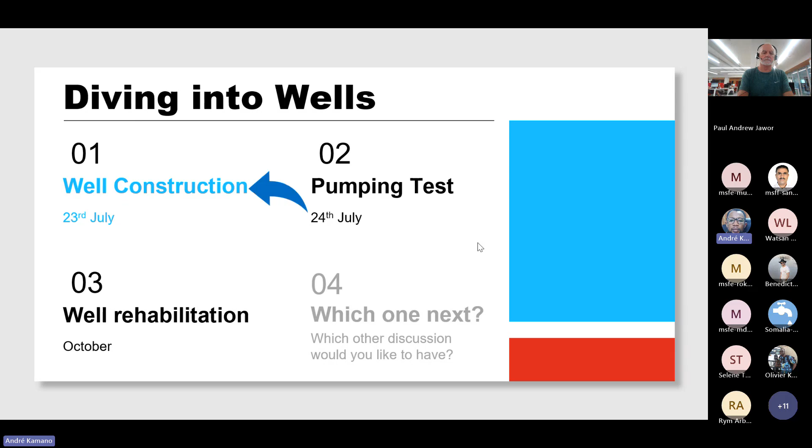So this first session on basics of well construction, we'll have as content: first, we'll be seeing the planning. In the planning phase, we will talk about why and when to drill a borehole. Secondly, we will be talking about well components, where we talk about the geophysics, the designing of the borehole, the supervision, and the flushing. At the third moment, we will be talking about the common mistakes that occur when we are doing the borehole in the field.

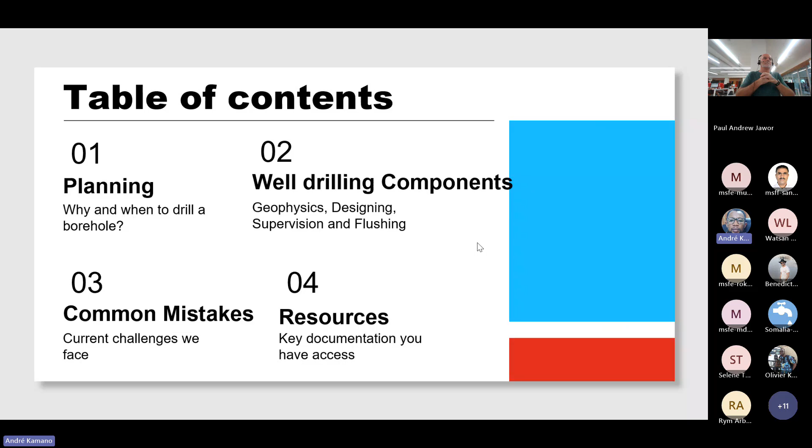So quickly, we will be having some key learnings that we hope everyone will understand and take away after this session. First of all, we'll be talking about some considerations. Main considerations are what we need to ensure before engaging in drilling a borehole. Secondly, we'll be talking about the components to understand all the steps that we'll be going through to realize or build our borehole. And at the end, we'll be talking about the monitoring session, how to supervise, and what data to collect.

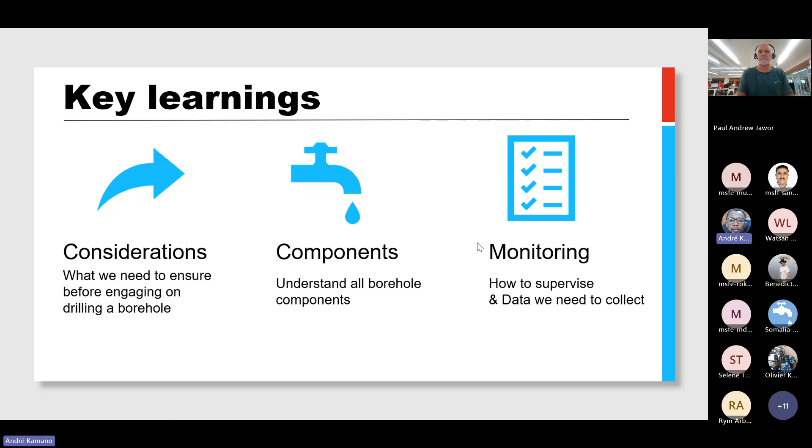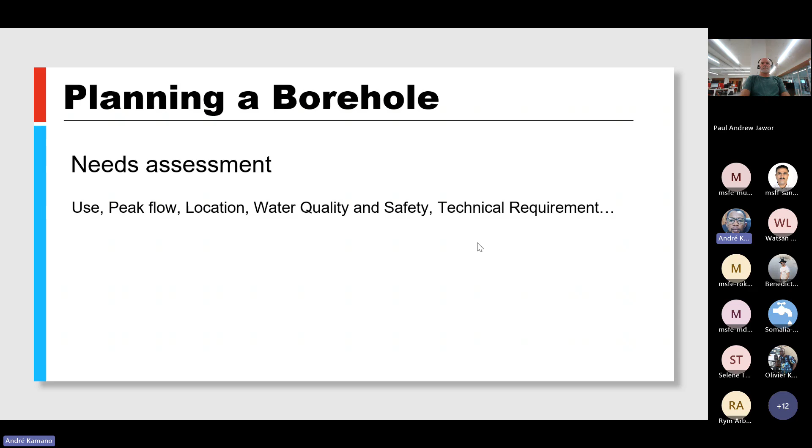We then start with the planning. When planning a borehole, compulsively we need to have the need assessment, which goes with talking about the use we will be having for our borehole. We will be having some idea of the peak flow - when is the need for the water that we are willing to produce. Then at the third point, we have to extend our thoughts on the location - where are we going to locate it. From that, we will talk about the water quality and the safety of this water - where is actually the safe point to have it. And later on, we will talk about the technical requirements. So these are the basic thoughts that normally we need to have when planning to have a borehole.

Upon those points, we may straightly look at the legal and community engagement considerations, which mainly are based on beneficiaries, but also authorities. Talking about beneficiaries means we need to consider the participation of community, which is very essential in terms of managing the system that we intend to build, but also to see how the authorities can manage it. On the other hand, we look at the question: if the authorities are not able to manage it after we have built it, what will be the outcome, or maybe the alternative of handing it to the community so the system can be more sustainable. So these are the first considerations that we may compulsively need to look at when trying to plan a borehole.

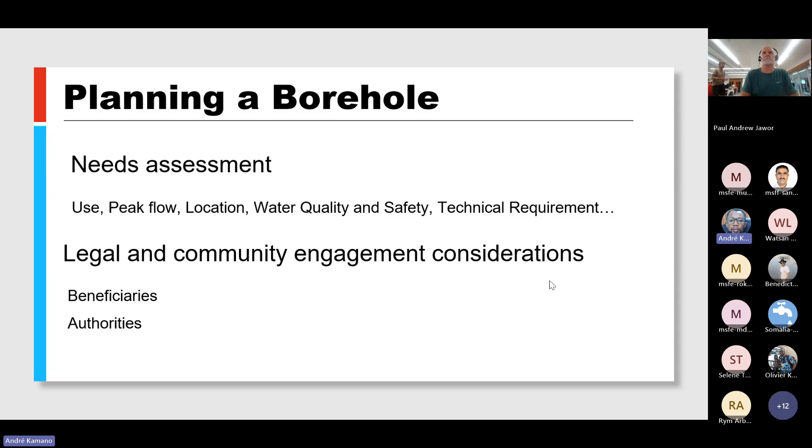After this, we now switch straight to the point, which will help us clarify more ideas about what we are planning to do. We then talk about the type of borehole you may need, since we have already gathered the information. We will decide whether we are going to have a borehole, but which type. So we jump directly to the different types of wells and boreholes that we may know.

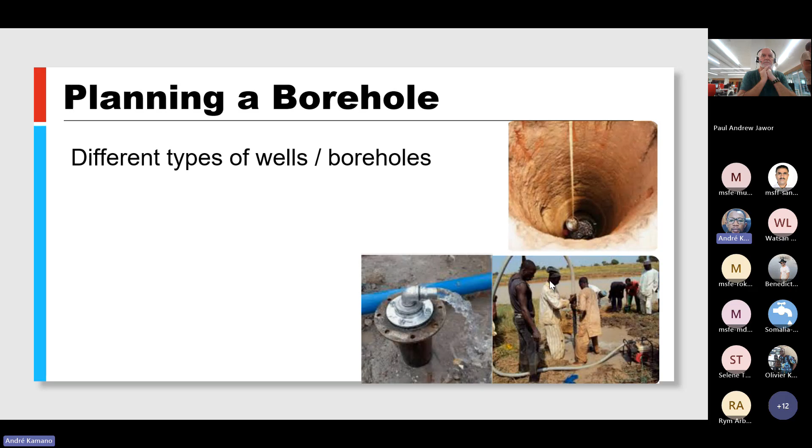For this webinar, we have chosen two criteria to talk about. The first criteria is the depth and the type of aquifer.

So we have chosen the shallow open well and boreholes, which you can see in the picture on the top right corner. Talking about shallow boreholes, we name them as boreholes that go up to 40 or 50 meters deep, not more than that. Mostly they are tapped in unconfined aquifer, and we realize they are most vulnerable to pollution because of the depth.

The second type in the first criteria is the deep borehole, which goes beyond 50 meters, up to 300 meters or sometimes above. These boreholes go into the aquifer, and they are more reliable, sometimes described as having a better quality of water.

The second criteria we have chosen for our webinar is based on construction methods. For that, we talk about hand-dug wells, drilled boreholes, jetted boreholes, and driven boreholes. Hand-dug wells are mostly manually excavated, and sometimes lined with concrete or bricks.

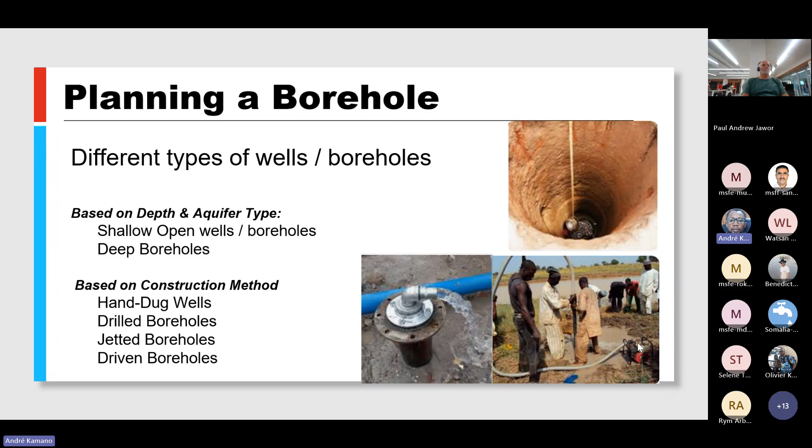Now we have decided we need to build our borehole, and we know what type of borehole we would like. Directly, the question will be, where are we going to drill it? We conduct some research that we call the geophysical survey.

The geophysical survey will help us choose or select the site where we are going to have our borehole or well. The geophysical survey is done in two phases.

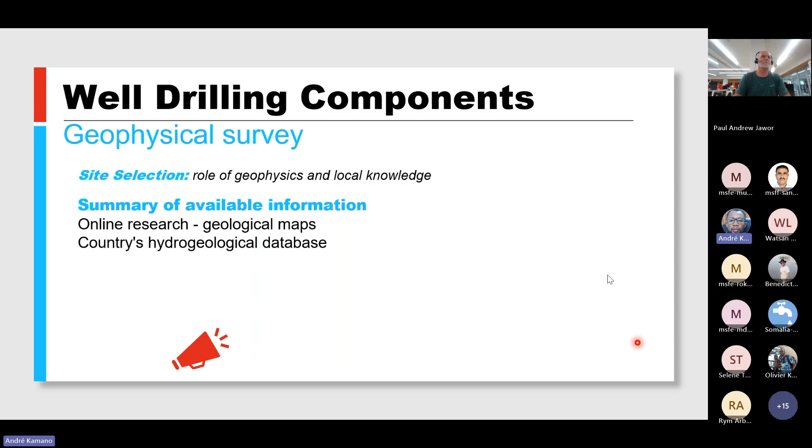The first phase is the summary of available information done online, which we can gather by consulting the geological map and also the country's hydrogeological database. After we have consulted all this information, it enables us to choose the probable sites we may select. There can be 2 or 3 of them, the probable sites we may select for our borehole.

The second phase is conducted on the ground, in the field. In the field, we carry out the exploratory phase, which consists of identifying the site with the best aquifer potential among those selected in phase 1.

This usually involves exploration using some methods. The methods commonly used are gravimetric, electrical, and can also be electromagnetic and seismic. After choosing, this helps us identify the best sites among those identified previously.

You have to notice that the geophysics is normally done by an accredited hydrogeologist, so that we can have the best result or analysis. This second phase of the geophysical survey is closed by writing a report, which gives us all the details and information we may need to develop our borehole.

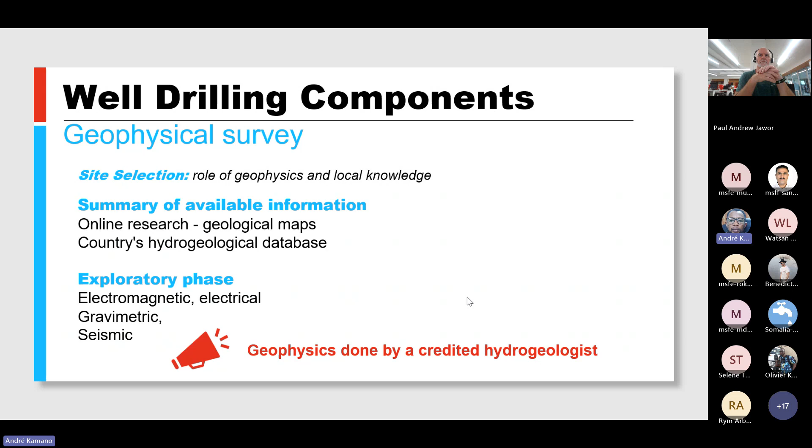Following that, we now start the designing, the technical phase of doing our borehole. We jump into the designing of the borehole. Talking about the design, we start by trying to estimate the depth, based on the water table, the aquifer locations, the geology, and also the water use.

As a reminder, all those points have already been identified or mentioned in the geophysical survey, which clarifies the questions we may have around the water table, the aquifer location, and the geology.

So what is then the basics that we may need to know when defining the expected depth? We may be focusing on the hydrogeological survey, as I mentioned it earlier, but also it is possible that we

use the test drilling. The test drilling consists of drilling a pilot borehole while monitoring water strikes and inflow, which indicates the aquifer that we have identified, or maybe that will be preferable for our borehole.

The third point here that we can use to estimate the depth of our borehole is local knowledge. By local knowledge, I mean consultation, or maybe visiting neighbors to see the borehole that they have, to ask them questions about the seasonal variation of the water level, the depth, and the yield of their borehole. This will give us an idea about the one we would like to drill in the community, and also some idea of how deep we can go.

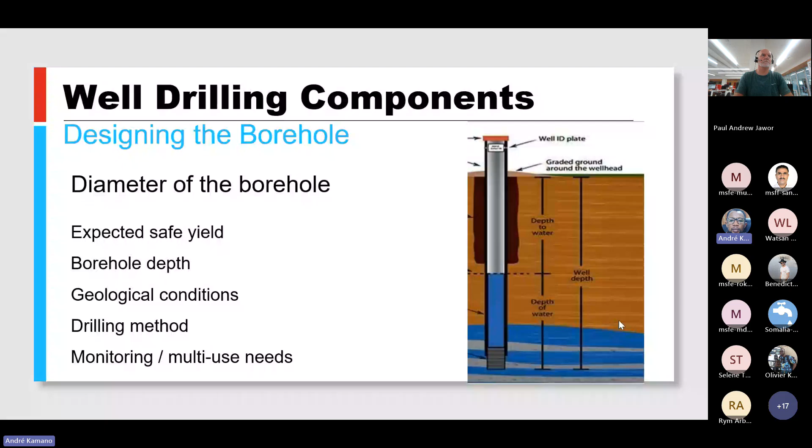The third point here is the geological conditions. In some conditions, unstable geological formations need a bigger diameter of the borehole, so we can try to have thicker casing, or sometimes condition it with supports like the centralizer, so the borehole does not collapse.

The other point we may consider in dimensioning the diameter of our borehole is the drilling method. When we have a borehole and we already define how the diameter should be done, we need also to consider the type of drilling method. There are drilling methods that have different diameters. Maybe we'll talk about the different methods later on and the possibilities of making it.

The last point here to mention is the multi-use need. If the borehole is to be used for monitoring or installing multiple sensors, we need a bigger diameter, so all the parameters or machines or other things we may put inside for monitoring the water can be incorporated and inserted.

We also have other considerations to look at when dimensioning the diameter of our borehole. It may be regulations in the country, the cost of making it, like the cost for the casing, the size of casing available in the country, or the type of pump that we may be using to make our borehole.

Okay, great. Thanks to those who have typed in the chat. Then I'm going now to show some drilling methods that we commonly find.

We will be talking about the first drilling method here, which is manual drilling, manual auger drilling. This is sometimes rotation by hands, which allows cutting into the soil, and passing the cut material up, sometimes by bucket. So we turn with hand, physical manpower, to see how we can make it. Sometimes it is like excavation, with material that needs to be moved by human labor. This method has both advantages and disadvantages. In terms of advantage, it is a very simple technology to use and sometimes cheaper. In terms of disadvantages, it is only used for very shallow wells, not more than 40 or 50 meters, depending on the geology.

The second type we'll talk about is percussion drilling, which is also very simple in terms of advantage, and sometimes low cost operation. But in terms of disadvantage, it is sometimes very slow, and it is also used only for shallow depth wells.

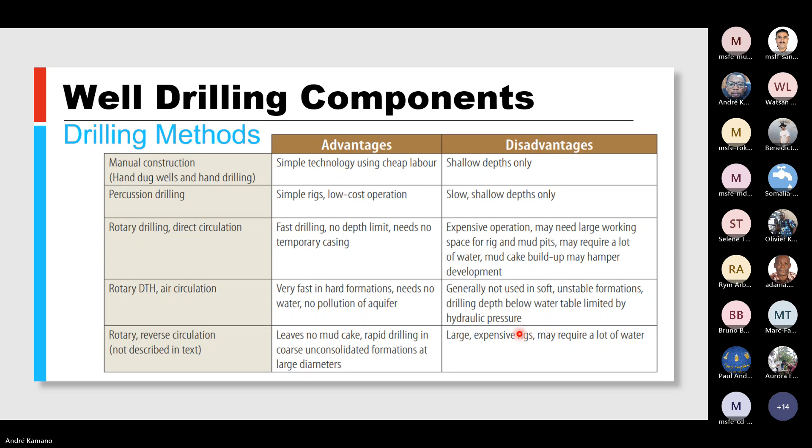So when we have chosen either manual drilling, rotary drilling, or percussion drilling, we conclude at one thing: the borehole, which actually has some components that I'm now going to display so you can see. Whatever method we have used, we finalize with these components.

The first component we mention here is the borehole casing. The borehole casing serves to prevent the collapse of the borehole that we are drilling. It also serves as a block for contaminants. Most of the time we use PVC pipes, or sometimes steel and stainless steel. The only condition we need in choosing those is that it has to be corrosion resistant and well sized when we are choosing it.

The second component we'll talk about is the screen. The screen will help us filter out some sand, but also allow the water to get into the casing.

The third one we may talk about is the gravel pack. The gravel pack will stabilize the borehole. It will also enhance the filtration. This is made by washed gravel. As you may hear it, the gravel pack is actually washed gravel, and sometimes sand, having a larger diameter than the screen slots. It prevents fine particles from clogging the screen.

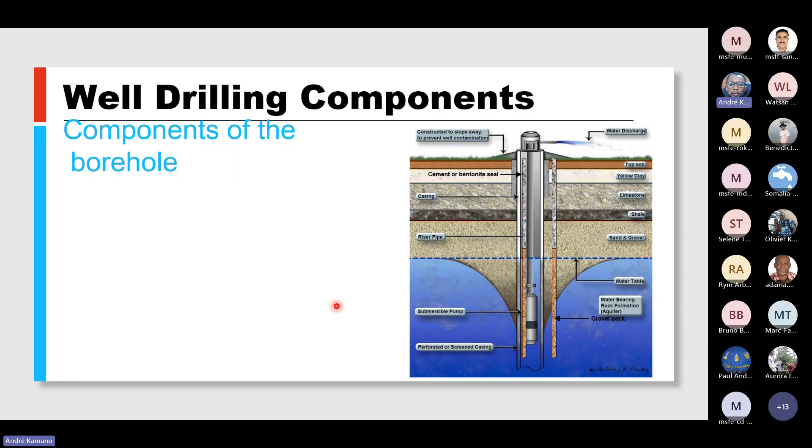Because when we are drilling, we are working with two actors: the driller and the supervisor. We'll be talking about their roles. The driller's role is to drill the borehole only according to the specifications that have been described by MSF or by the clients.

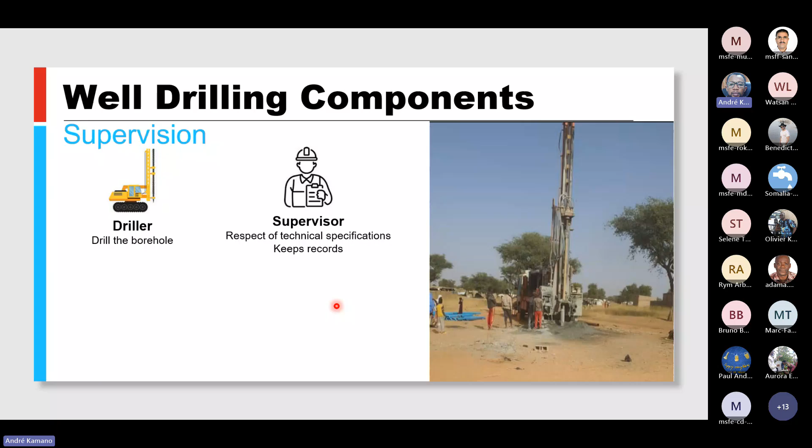The supervisor is here to watch the respect of technical specifications and also to keep the recordings. In the case of MSF, this can be an MSF staff or a representative of MSF if MSF is not able to reach the area where we are performing the activity.

And why should we have the supervisor in terms of drilling? Because we have realized that according to the rural-water-supply.net sites, 60% of groundwater sources that are not working in some African countries fail due to poor and substandard construction.

You will realize that during construction, if there's no supervision and the driller is not conscious while doing it, he will try to make it as he wants, taking the easy way, and then it will fail.

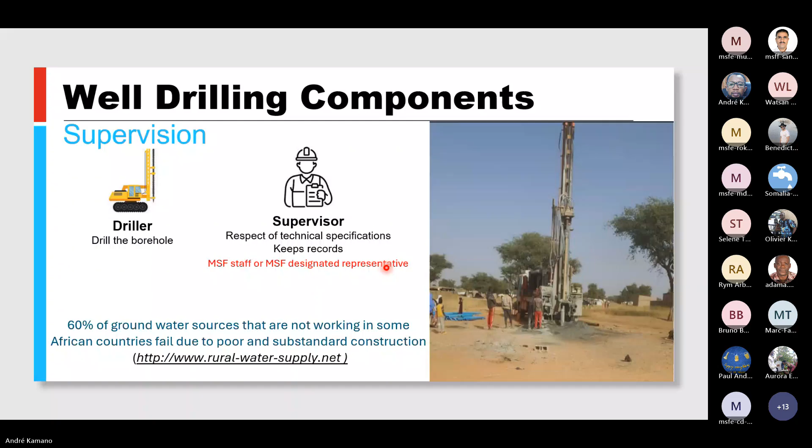We'll be talking about a few tasks to show the importance of supervision in drilling boreholes. Let me take an example of drilling. During the drilling, what the driller is supposed to do is position and operate the rig to collect samples and make the report. This is what he will be doing.

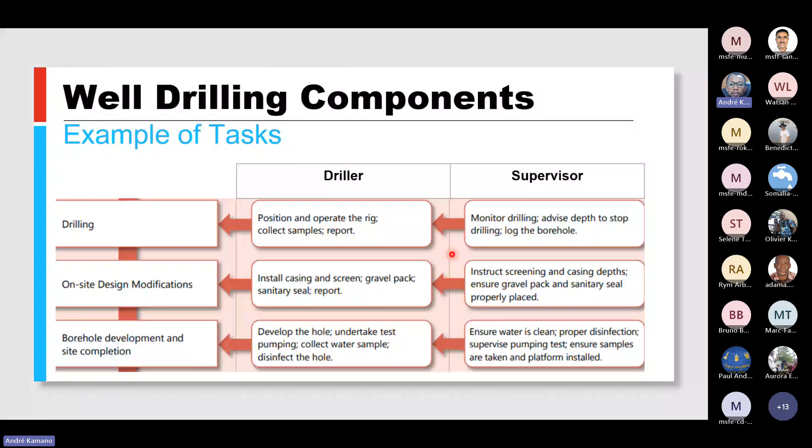While doing that, the supervisor should be around, monitoring the drilling. He will also advise on the depth to stop drilling or continue, or to log the borehole, because as we will see later when talking about quality assurance, the supervisor should be around recording all the information needed to recognize whether the borehole is well done and has respected the prescriptions set in the technical specification at the beginning.

So the supervision can be at several levels. First, we'll talk about full-time supervision. This is when the supervisor remains with the drilling team throughout the entire process, moving from the beginning till the end, being around, recording everything, and advising on each modification that should be made.

The second level of supervision is part-time or milestone supervision. This is done when you have a contractor that you have trusted and know the quality of his work beforehand. The supervisor will be present only at critical moments, like site selection, drilling termination, mobilization, or construction of the platform at the end. Only at key moments will he participate; at other, less crucial moments he will be away.

The third level of supervision is the end of contract inspection. This is when you have a fully trusted contractor who performs the work, and at the end the supervisor comes. This is not true supervision but rather a final inspection to be sure everything went well, and to collect information about what was done.

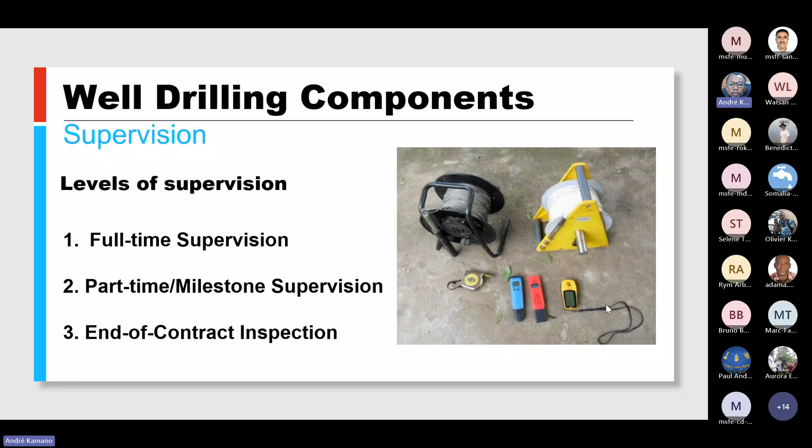Okay, then how should we make a proper supervision when we are drilling the borehole? Doing the proper supervision to ensure quality will lead us to filling up some forms when the driller is performing his work. We have a document called the borehole drilling log that we try to fill up according to the different depths, according to the different levels of the ground. We fill it up according to the various changes that happen.

When we are filling this one, it helps to determine, okay, we have defined 80-meter depth, approximate depth for our borehole, but arriving at 70, maybe the supervisor may say, okay, we can stop here, we have reached already a level where normally we can stop. We then validate that, or he will say we should continue up to the 80 meters.

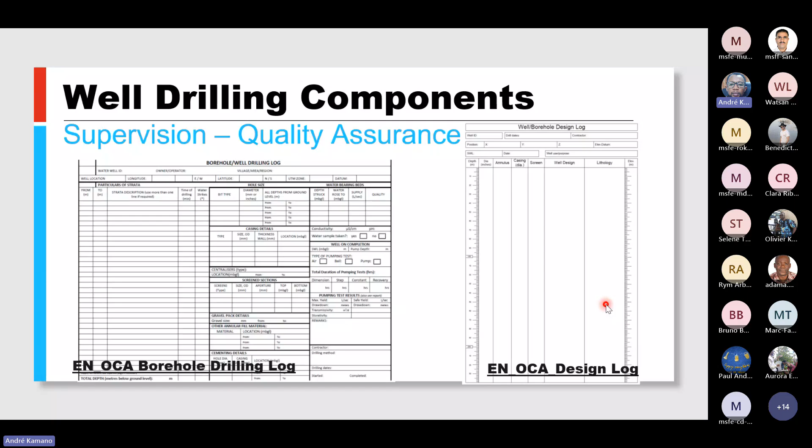The other document that should also be filled when drilling the borehole is the design log. As we mentioned at the beginning, we need to design the depth, but also the diameter and everything. This second document will also be filled by the supervisor, who is the representative of MSF, watching closely the changes that happen during the drilling.

After he has filled the design log, he will then decide when to put the gravel pack, where to place the screen, the sanitary seal, and the casing also - all the places that should normally be done, you will be watching at them. So this is how the supervisor can ensure the quality of drilling a borehole.

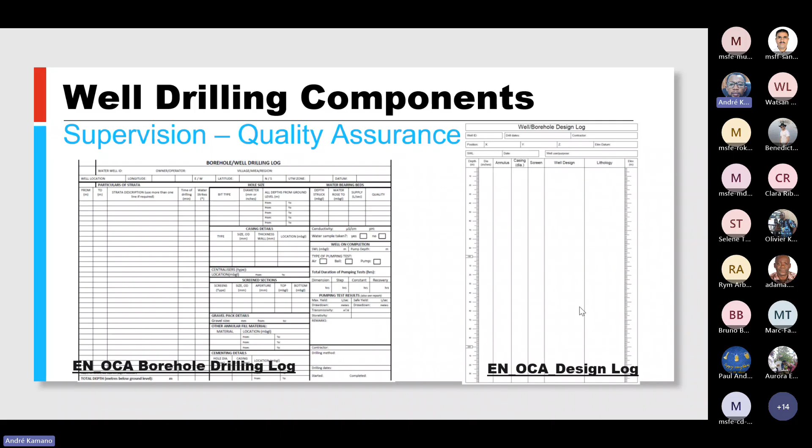After that, we'll have a critical step, which is actually the flushing. Most of the time, when we have a contractor that we are not following closely, he may do something else, but we should make sure that he does the flushing. Okay, what is then? Why is the flushing made?

The flushing is done to remove all the drilling residues, but also to improve the water inflow in the casing, to clean the screen and the gravel pack. It also helps remove the thin sediment to prevent clogging in the near future, and to check that the water is clear, so we don't have turbid water in the well.

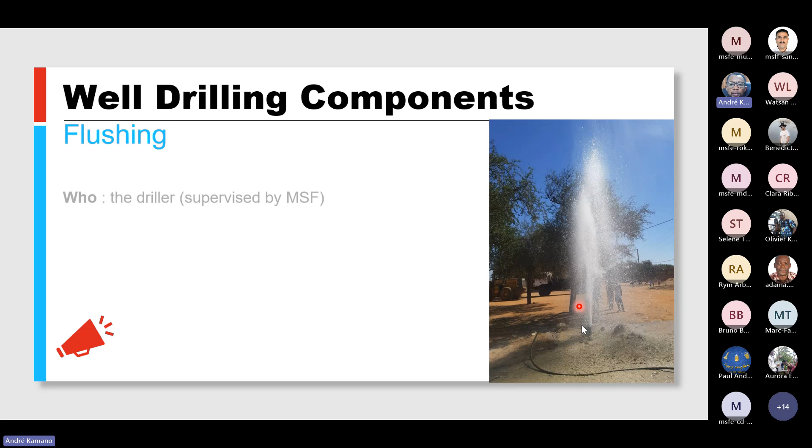It is done by the driller. The flushing is done by the driller. Why is it done? It is done to develop and to clean the borehole.

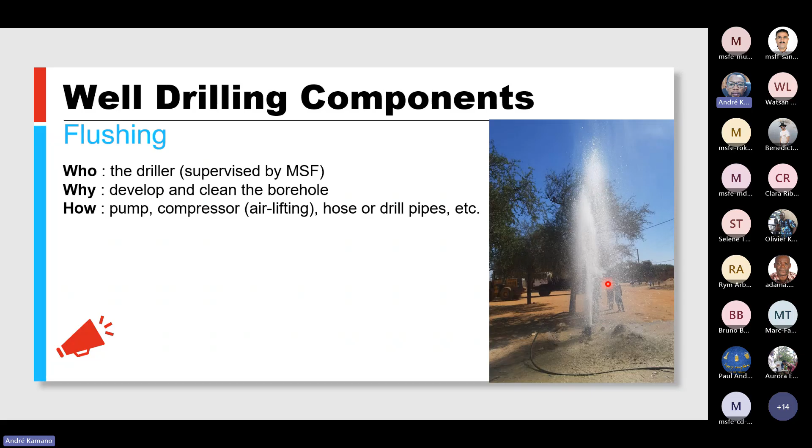How is it done? It is done by putting a pump inside sometimes, but in most cases by the compressor, by air lifting. In air lifting, they put a high pressure of air inside the borehole, and the air will help lift up some residues and clean up the screen. In the end, you will see that the water is coming up through the effect of the air that is going inside.

And it also has a duration. The duration of the flushing will depend on the depth and also the geology. What helps us determine that we can stop the flushing is when we have clear water, and when we know the yield is actually stabilized.

You have to bear in mind that the flushing is different from the borehole testing, which is done over hours and according to some procedures. That is why we have planned to go more in depth tomorrow with our webinar on borehole pumping test at the same time, and maybe some have registered already.

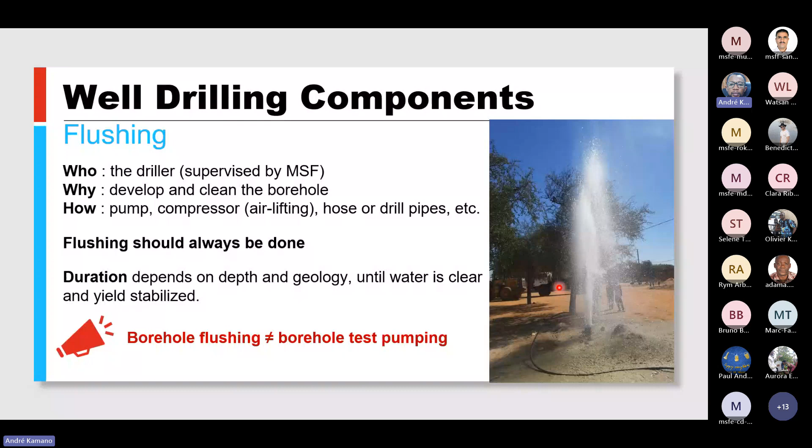Arriving here, we are now going to continue to the third part of our webinar, which is the common mistakes encountered in terms of drilling the borehole. If I may ask, should someone take maybe 10 seconds to type some common mistake that he has encountered in his project or in drilling the borehole? Feel free to type it.

To gain time, we are going to continue by saying that the most common mistakes that occur when we are having a borehole are as follows: the poor location choice, like I said in the beginning, and secondly, the poor well design. So when the location is poorly chosen, you will realize that the construction might lead to a dry well. You will drill it, and later on it will not produce water. You will go to the depth that you have designed, and you will not find the water.

That is why we mentioned that the choosing of the location should be done by accredited geologists when doing the geophysical survey. The poor well design: if the geophysical survey is not well done, we may design it poorly. We will not be able to design the depth and also the diameter, which then leads to the failing of our drilling.

The third common mistake that occurs is the improper installation of the casing. This happens when supervision is not well done. That is why we emphasize that we should be having a supervisor when drilling the borehole, and the supervisor should be recording the information throughout the drilling process.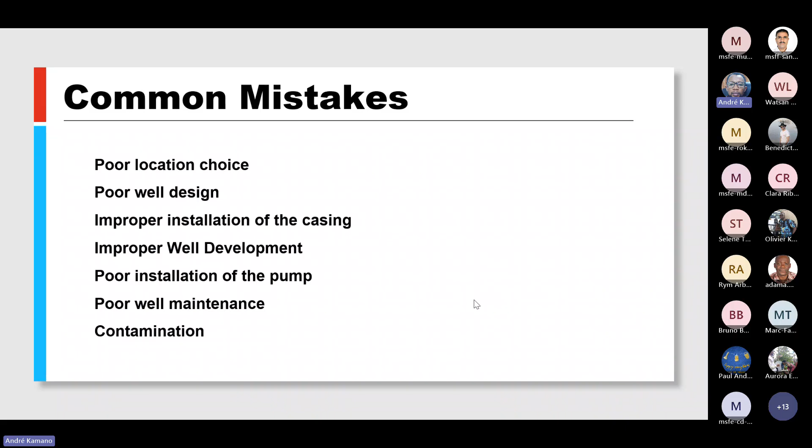The last, not the least, mistake we have mentioned is contamination. The key issue in well drilling is contamination. So to keep surface water, septic tanks, or other sources of contamination out, the well must be built correctly and grouted. That is why we need to supervise our borehole drilling correctly.

Then we will talk quickly about the tendering process, which incorporates different phases. In most cases, we can separate the geophysics as a separate tender, with borehole drilling and equipment, plus the pumping test together. But in most cases, these three phases can be merged. We just need to clarify them and bear in mind that there are different techniques to specify and consider for each phase. So when merging the contract for all those, we need to be very careful and very clear when placing the technical specification.

Another thing to keep in mind is the pump, which is normally also part of the borehole after we have finished construction. We should not merge the motorized pump provision with the drilling contract, because the driller will say, okay, I have drilled it, let me put this type of pump inside, and then it's possible that the dimensioning is not correctly done.

For this one, any time that you have a project of having a borehole, please contact your watsan friend, so he can help in terms of designing the accurate pump since the beginning, and he can also help in terms of process.

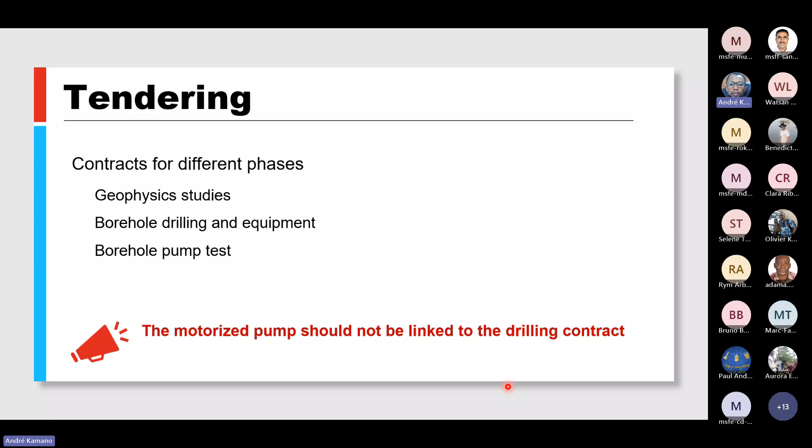Reaching here, I'm now going to show the last part of the webinar, which are the resources. Talking about the resources, we make available in Logly all the resources that you may need for performing this activity, beside the consultation of your technical reference.

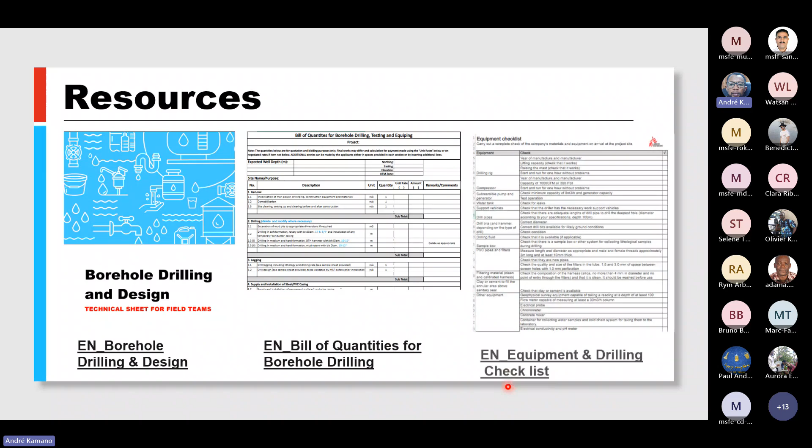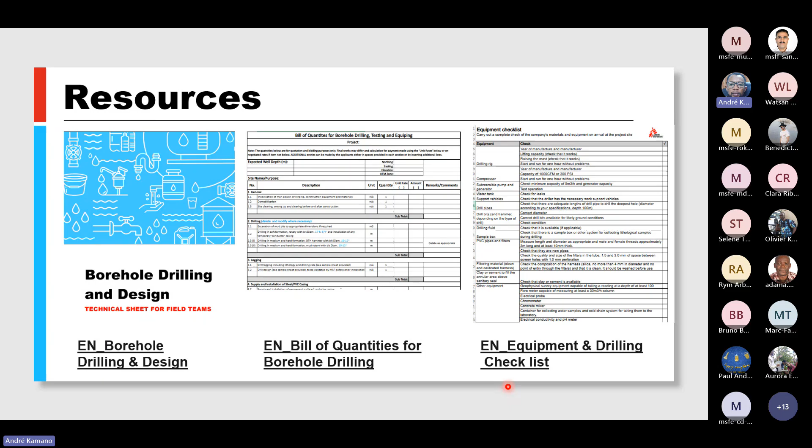We have the borehole drilling and design book, which is done by MSF, a technical sheet for field teams. We also have the bill of quantities for borehole drilling, which is available and accessible to all. The third one is a list of drilling equipment, a checklist. When you have a drilling project, you can go through and check all the equipment and the list if they are accurate.

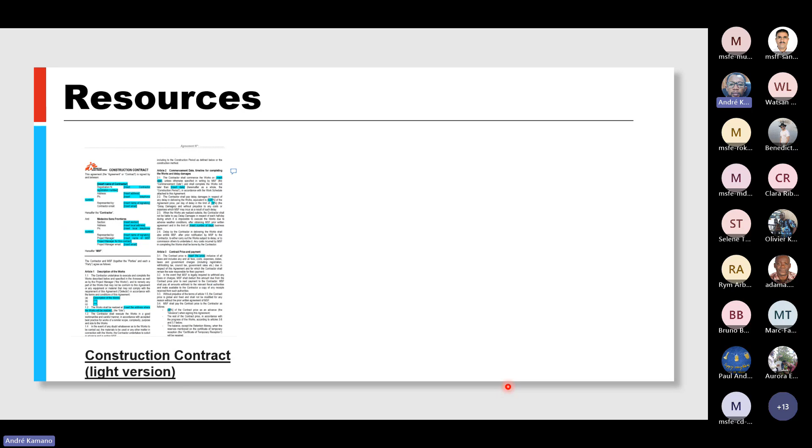The following resource we are going to share with you today is the construction contract. Because if the contract is not well done or well written, you may miss some points which are very important in terms of clarifying the contract.

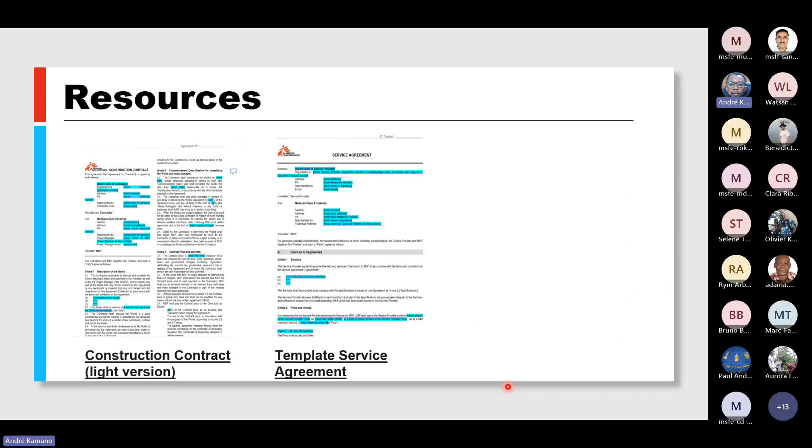The following one is the template of service agreement when doing a borehole, in case you are trying to have the geophysics separately, the drilling and the equipment separately, and if you are also willing to do the pumping test separately.

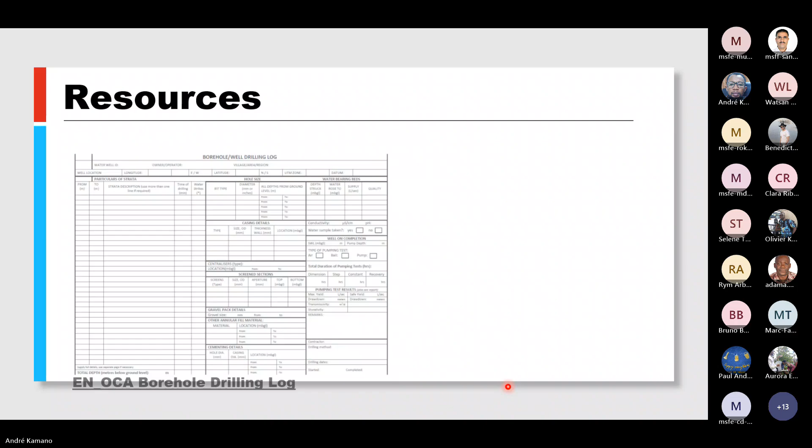We have mentioned already some few documents at the beginning in the quality ensuring part. We mentioned the drilling log and also the design log. These are documents of one page each, which are available for our activities.

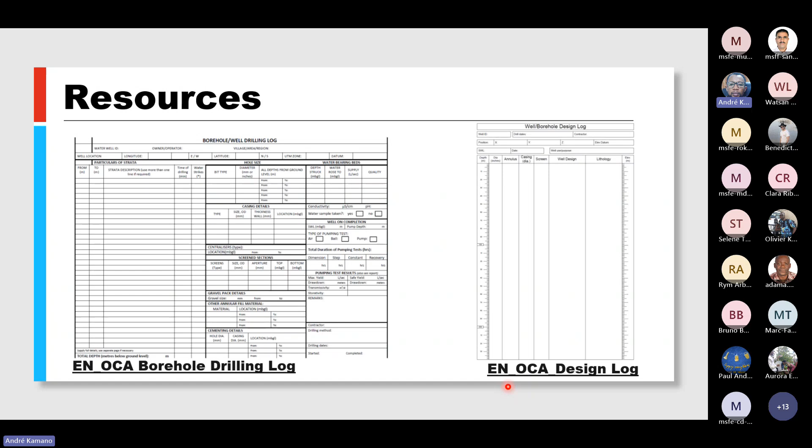Reaching here, I will now summarize the points that we have seen. What we have talked about these 45 minutes are the considerations: the community engagement, the need assessment, and the type of borehole in the first part.

The second part, we talked about the components, or maybe the steps, in drilling a borehole. At the end, we talked about the monitoring type, the supervision, how to supervise, and also what data to collect.

Arriving here, I will thank everybody and we'll be listening to your questions. Thanks.

Your questions are welcome. My colleague Olivier will be around to help with that. Thank you, Andre. Please, if you'd have, Paul, you can help us with the questions while people are asking. I see there's one question already asked from Juba, and I'm seeing some other questions from Theodore.

I can start with the first question, which is asking the maximum distance from a borehole to the end users, if I'm not mistaken, right?

To answer this question, I would say there is no maximum distance that exists to separate the borehole and the community or the end users. What you have to take into consideration, as Andre was saying, is the proper sizing of a pump that will be able to move the water from within the borehole to the possible location of the end users, whether it's a tap stand, a water tower, or so. So I don't think in any literature you'd see where they tell you you should install your borehole 10 meters away from the community, or 100 meters, or one kilometer away from the community.